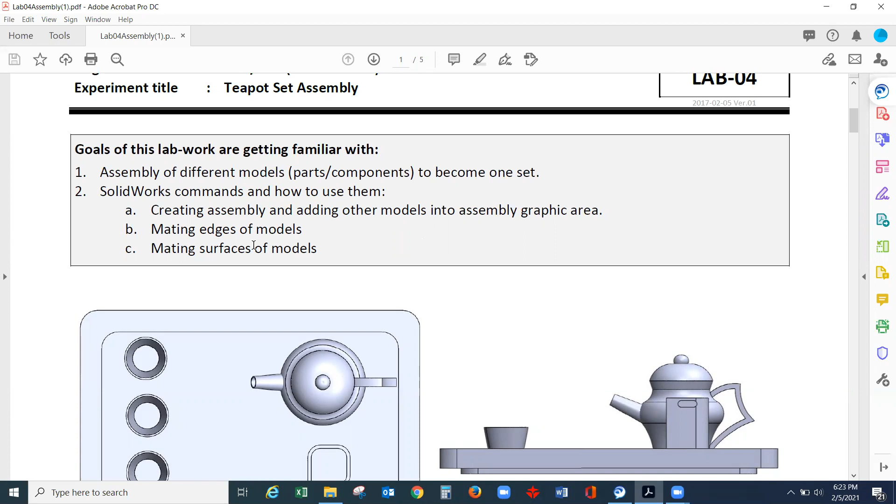The first step on this lab is to open the parts that we need to assemble. From experiment number 1, we completed drawing a cup. On experiment number 2, we completed drawing the teapot. And experiment number 3, the dishpan. And one of your exercises is the toothpick holder.

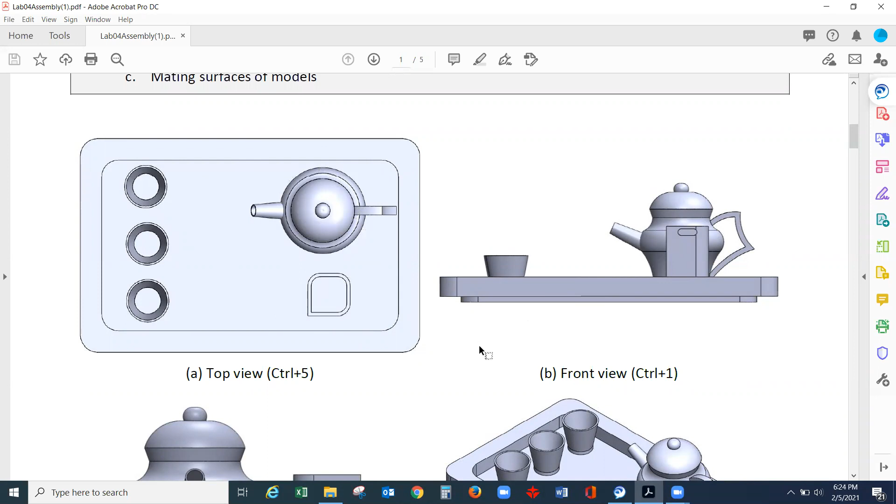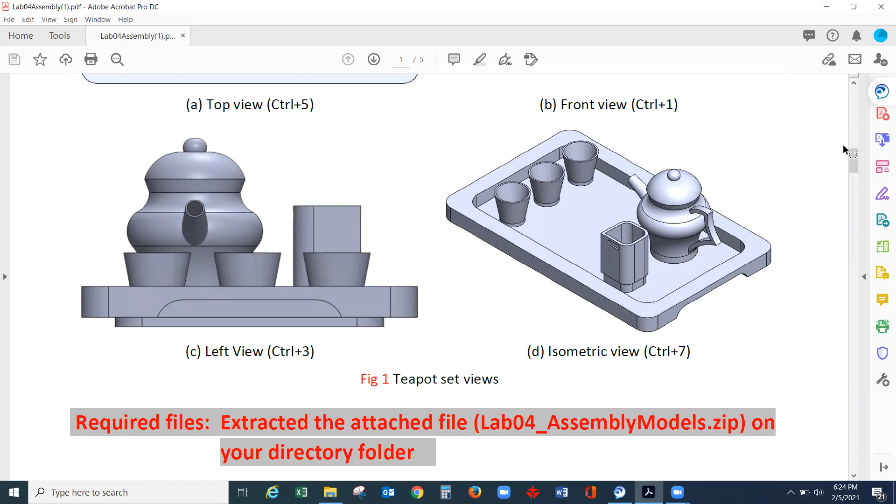So we will open the drawings. For us to be in common, on your BBLearn all of these parts are available. What you need to do is download and save it in your folder.

Let's follow the steps. Step number 1, creating the assembly. You need to open two files. We will assemble first a teapot and a teapot lid. So open the folder that you have downloaded and then open the teapot. Just double click and your SolidWorks will start opening it.

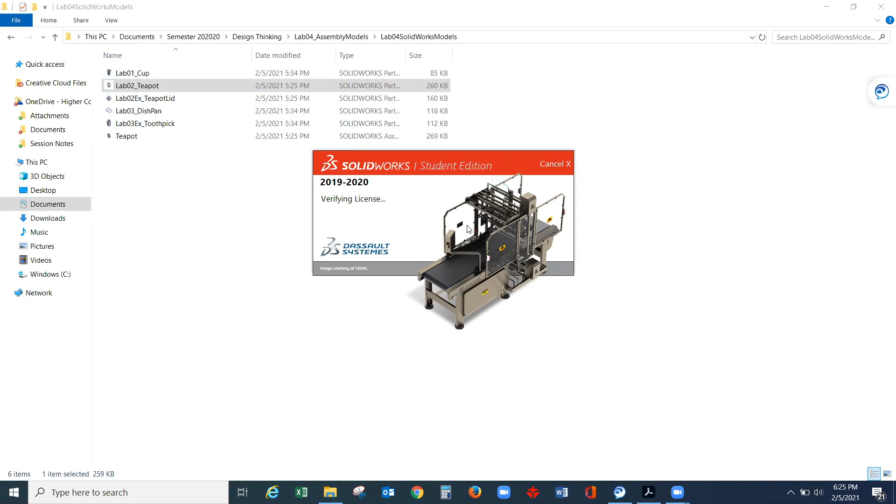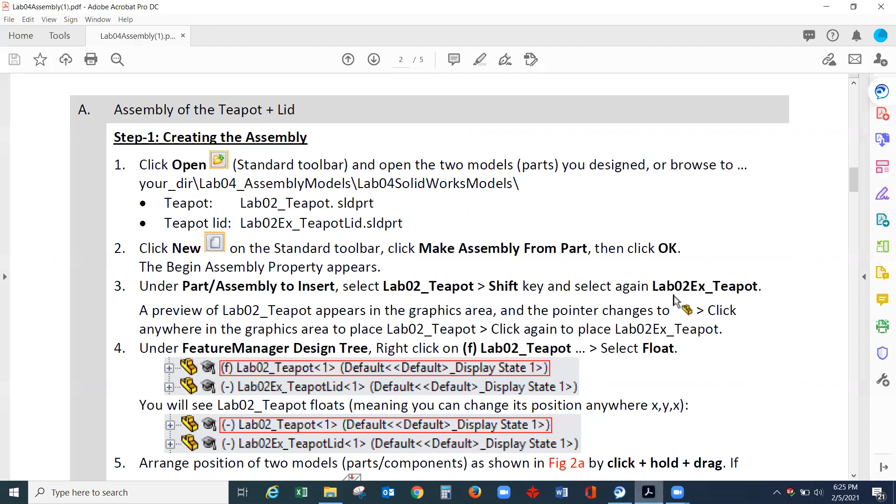So we will open the two files at the same time, first the teapot lid and then the teapot. As you can see here on the figure, for our top view, front view, and left side view, also the isometric view. So this is the final assembly that we need for this experiment.

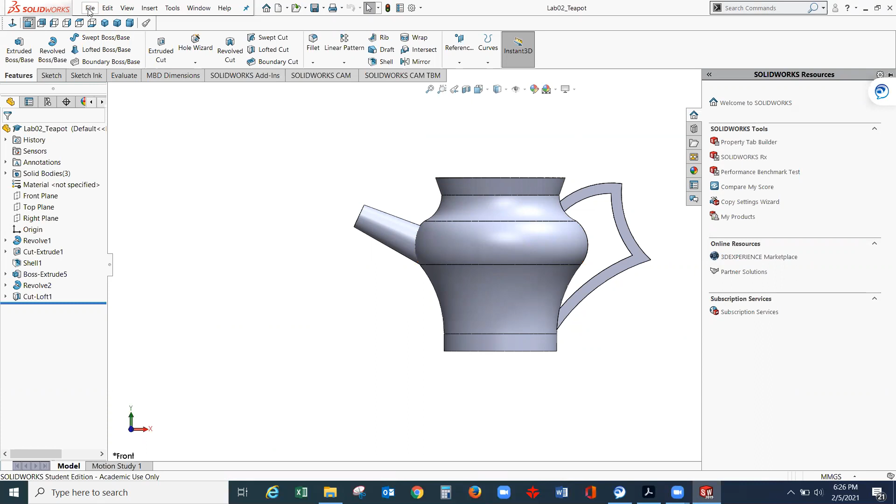So this is our teapot. We need to open one more file, which is the teapot lid. This is one of your exercises, so open it. This is the teapot lid.

Let's follow procedure number 2. Click New on the standard toolbar and then select Make Assembly from Part. Where is that? Make Assembly from Part. Go to File, Make Assembly from Part. Select this option.

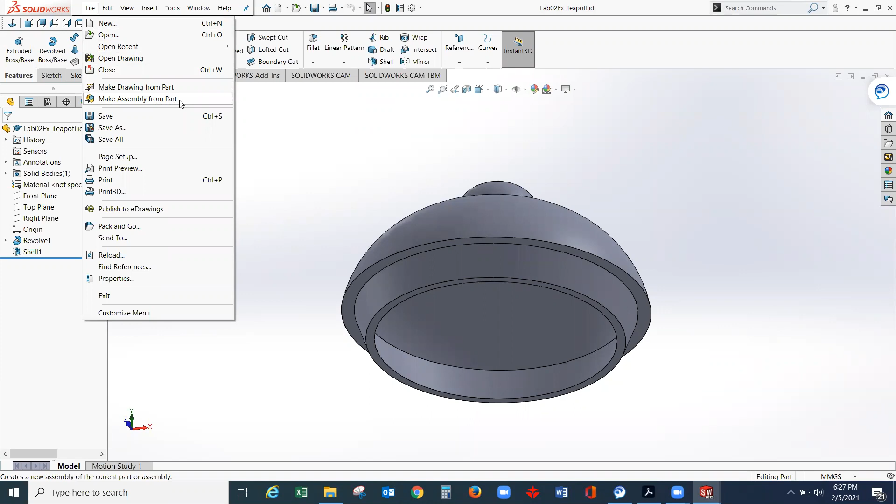Once you've selected Make Assembly from Part, these two files are here under Part or Assembly to Insert. The first one is highlighted in blue, meaning it is selected. So press the shift button on the keyboard, then select the other one, teapot lid.

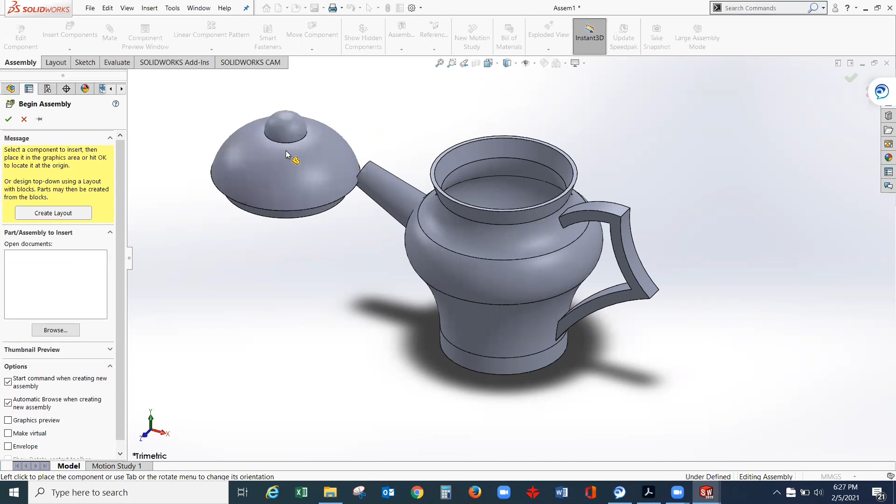Then click anywhere on the drawing area and your teapot will be inserted on the drawing area. Click again anywhere to insert the teapot lid. So now I have my two parts.

You can move this one anywhere; just click and hold your left mouse button, and you can move and place it anywhere on your screen. Now here on the FeatureManager Design Tree, you'll see a minus sign and an F sign. So for teapot lid or teapot, I go to teapot, right click, and select Float. The F symbol will turn to a minus indicator. So both are minus, meaning you can move your drawing anywhere on the drawing area. This is to float.

Let's check the steps. Step number one, creating the assembly - it's done. We opened the two files and then created assembly from part - number two is done. Then under Part/Assembly to Insert, select both by holding the shift key on the keyboard.

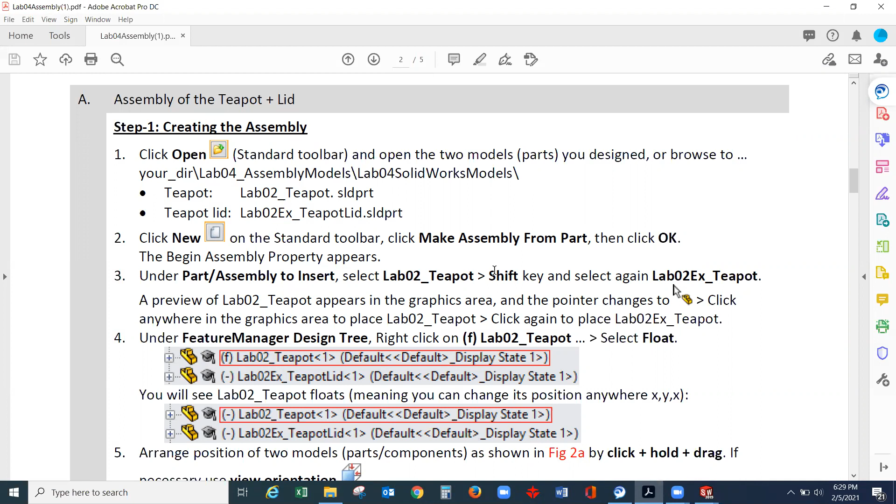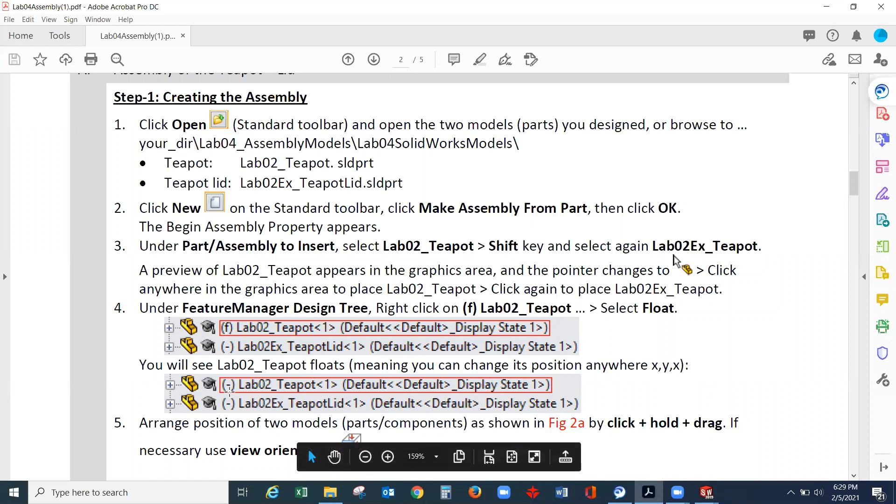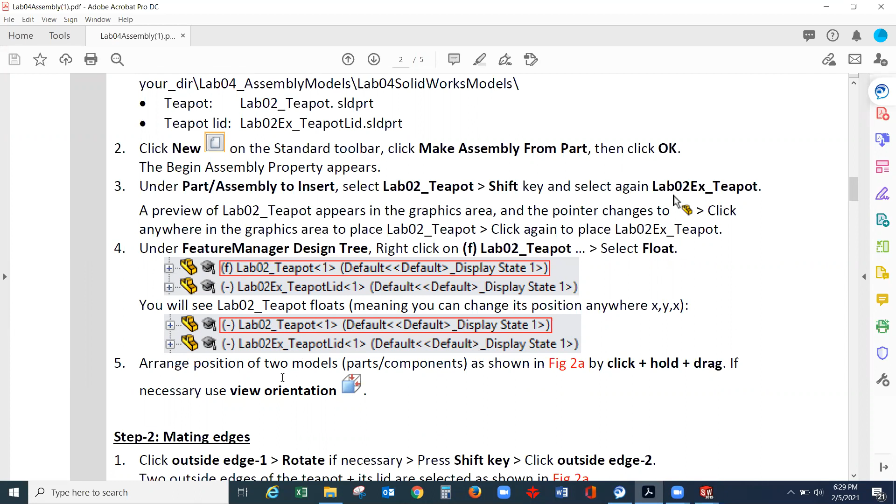Then under the feature manager design tree, this F symbol, right click, we turn it into a minus sign, so both are movable. We can move around the drawing area and arrange the position of the two models by click, hold, and drag using your left mouse button, or use the view orientation if you want.

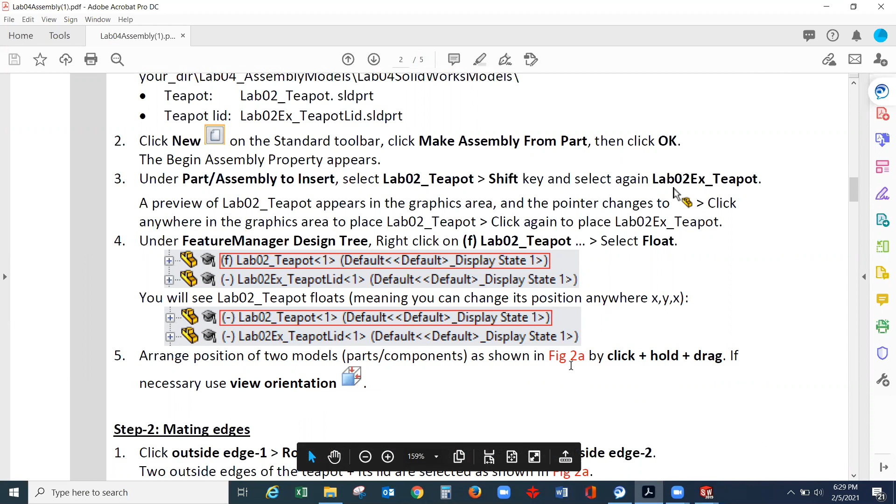Click, hold, and drag as shown in figure 2A. Where is 2A? This is it. So we will position the teapot and teapot lid on this position - move the teapot lid on this side and the teapot under the teapot lid. So this is the position.

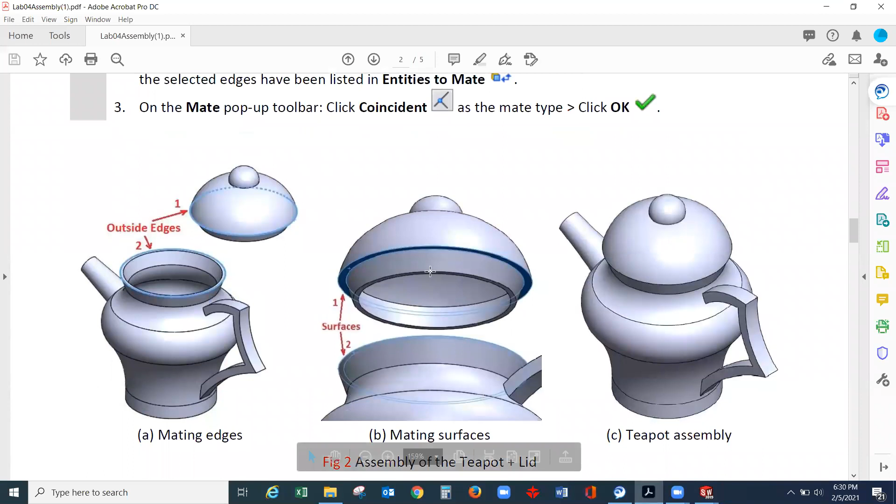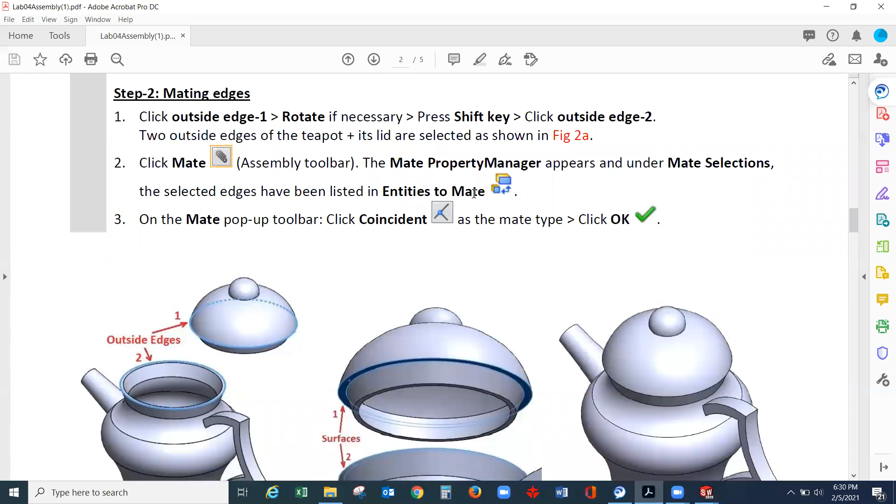Let's go for step number 2, mating edges. Click outside edge 1 and rotate, then press the shift key, click outside edge 2. As you can see, once you select the outside edge 1 and edge 2, they will be highlighted in blue. Then click the Mate option on the assembly toolbar. If the mate pop-up toolbar appears on the screen, select the Coincident option, then select OK. So this is our first mate.

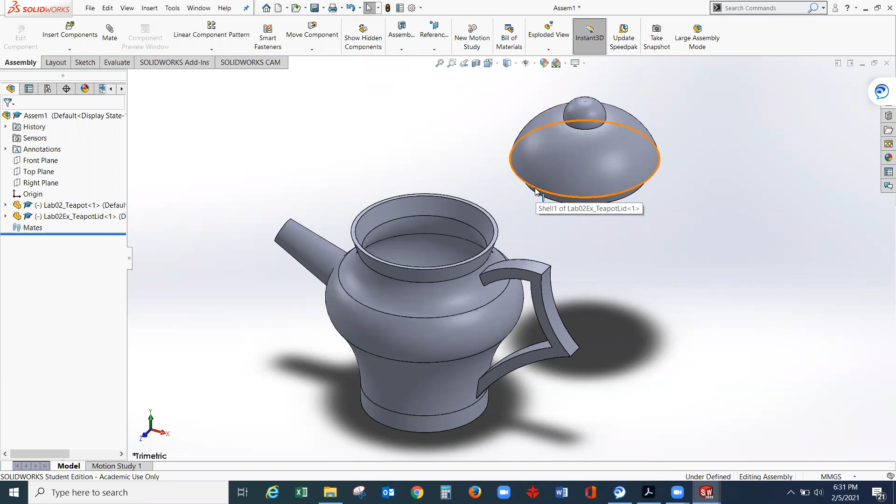From this position, select this outside edge of the teapot. Select it, it will be highlighted in blue. Then shift and hold the keyboard, and select this outside edge 2.

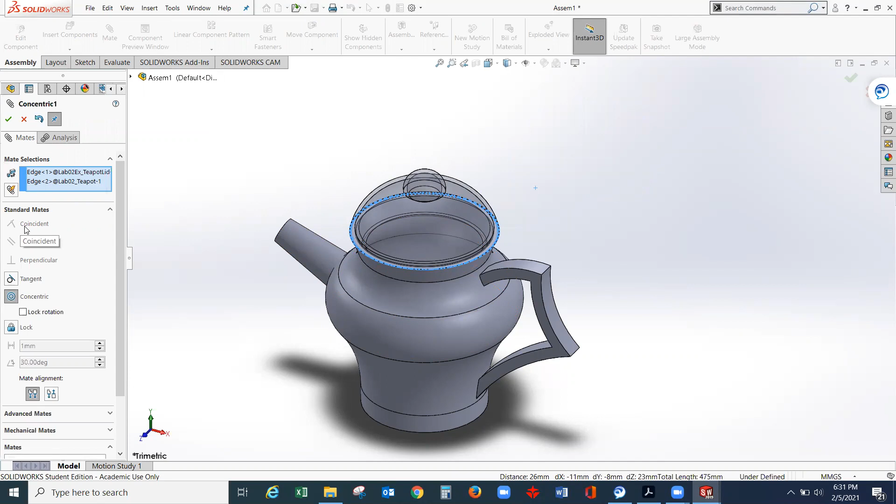Under the assembly toolbar, select mate. It will automatically join. So this is the mate selection, edge 1 and edge 2, and it is automatically coincident, so no need to choose anything. Then select the green check mark as OK.

As you can see here, you can still move the teapot lid from the teapot by moving up and down, so we need another mate to fix this.

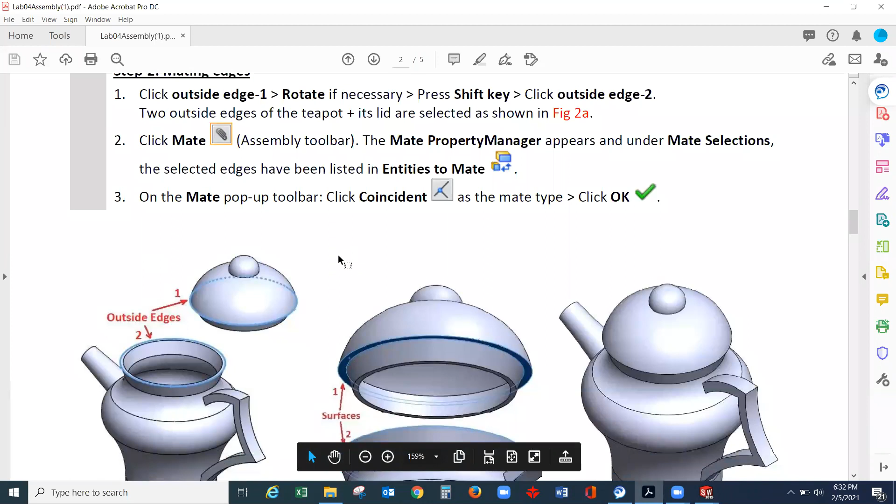In the lab sheet, go for step number 3, mating surfaces. So we will mate the surface in this case. Click surface number 1, press shift key, and click surface 2. So two surfaces of the teapot and its lid are selected, as shown in figure 2B.

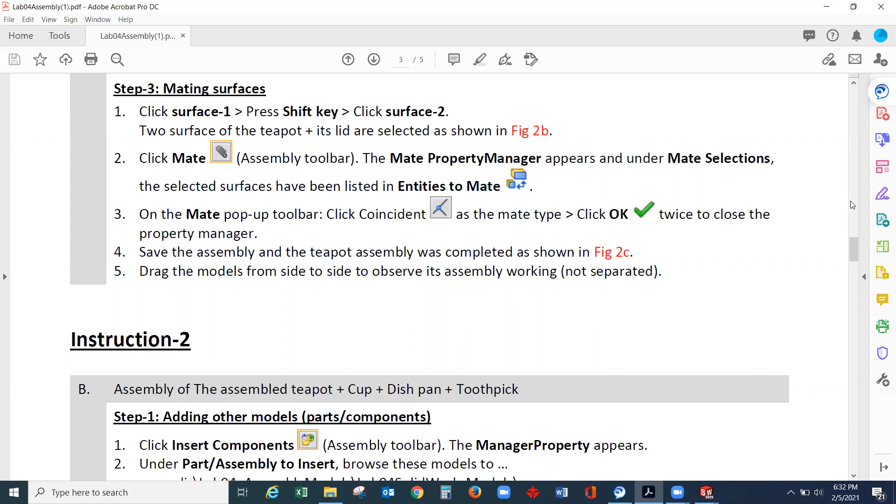This is our figure 2B. So we are selecting the surface. On the first option we select the edge, we are selecting the outer edge. Now take a look on the surface.

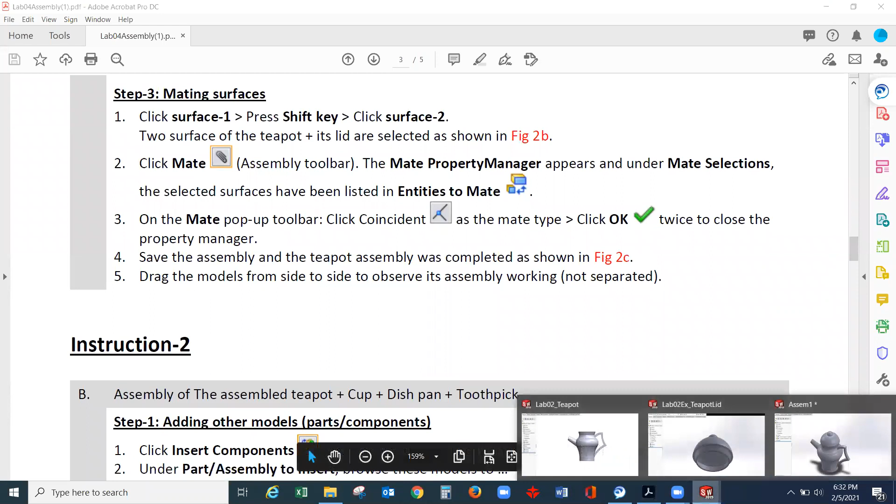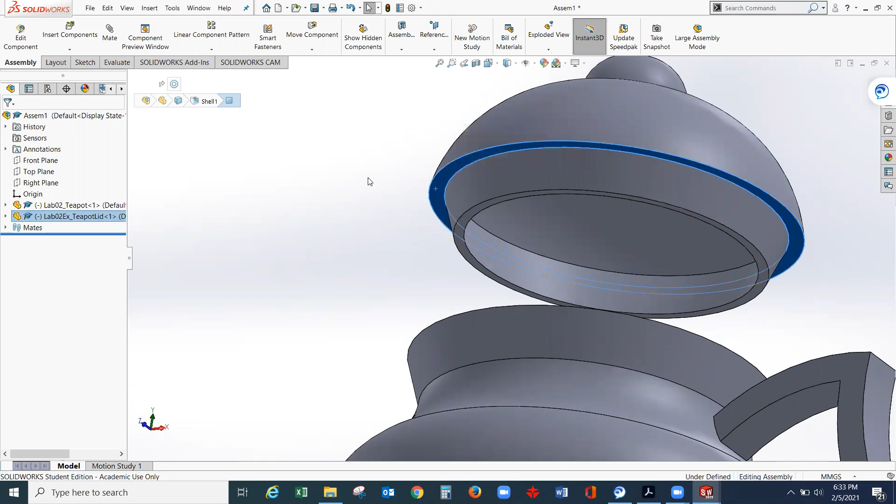Let's do this mating of the surface from here. You can rotate this one by holding your middle mouse button, click and hold to rotate. Once you see this surface, I'll make it closer. Once you see the surface, select it - not the line, this surface. Select the surface, it will be highlighted in blue, and then rotate by clicking and holding your middle mouse button.

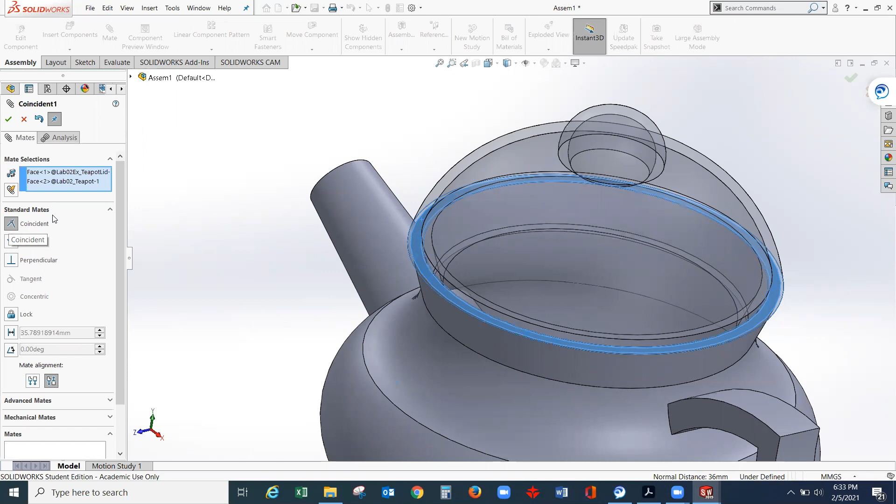Shift on the keyboard, hold it, and select the surface of the teapot. So this is our surface number 2. Then the same steps, select mate and coincident. It is active now, coincident, and check.

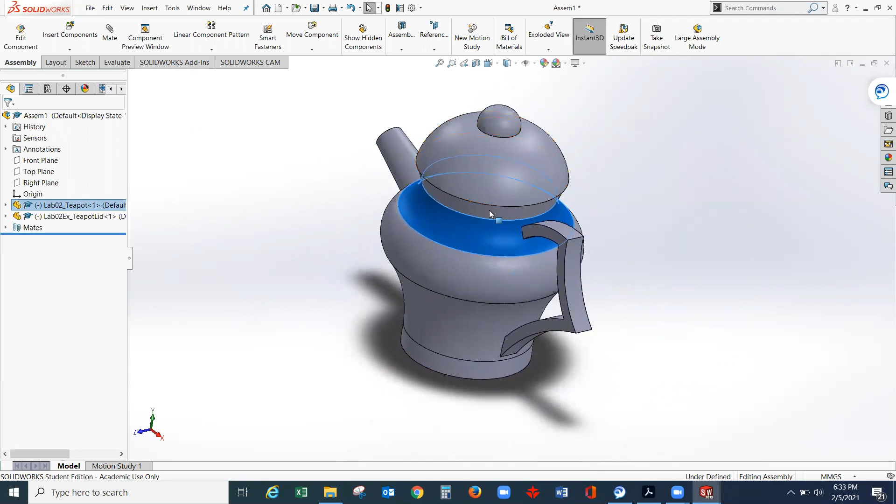We'll zoom out. As you can see here, if you move the teapot, the lid will come together with the teapot. So they are fixed together by using these two mates.

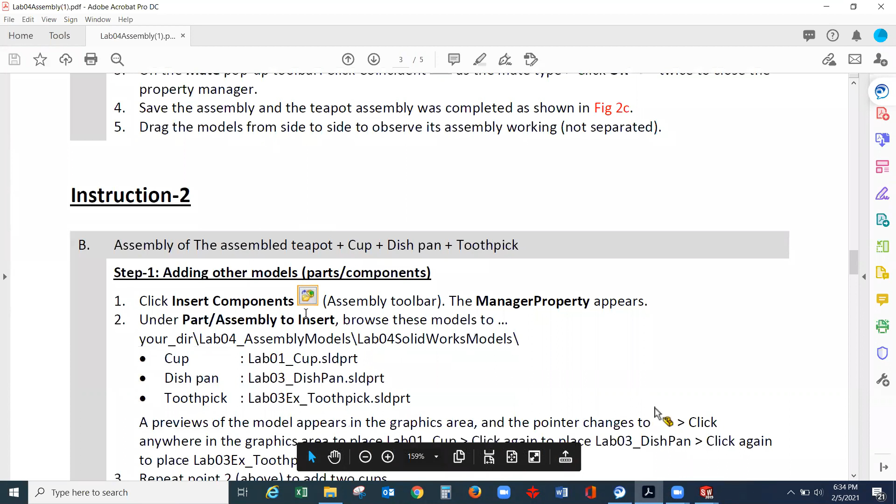And now for instruction number 2, assembly of the assembled teapot plus cup plus the dishpan plus the toothpick. So these are the steps. Step number 1, insert components.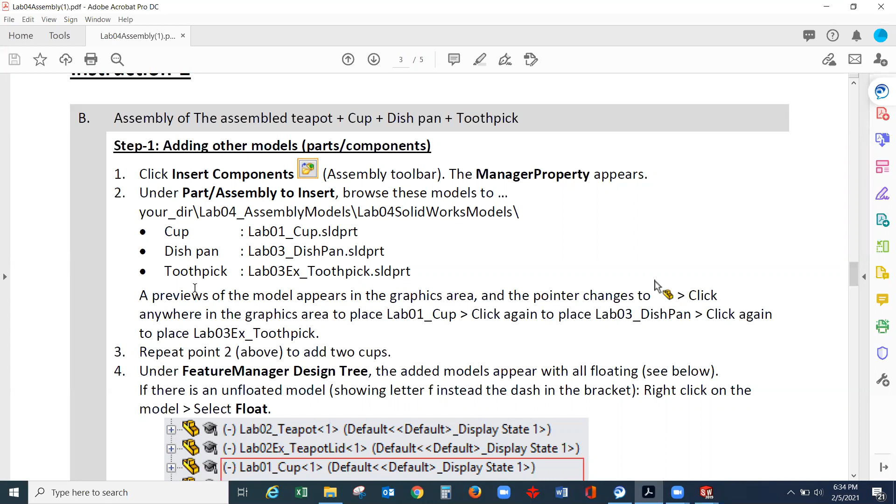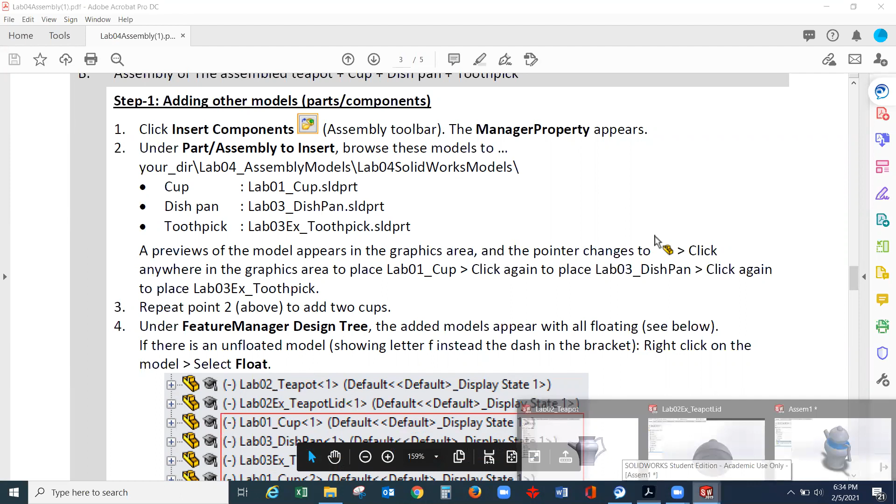Insert components. Under part assembly, to insert we will browse this model - the cup, the dishpan, and then the toothpick. Then we will repeat it to add 2 more cups. Let's insert components here.

On the assembly toolbar, there is one option, insert components. Select insert components, then browse the folder for where you saved the files. In this case, we will select the cup, hold control on the keyboard, then dishpan, and then the toothpick. So we select 3, then open.

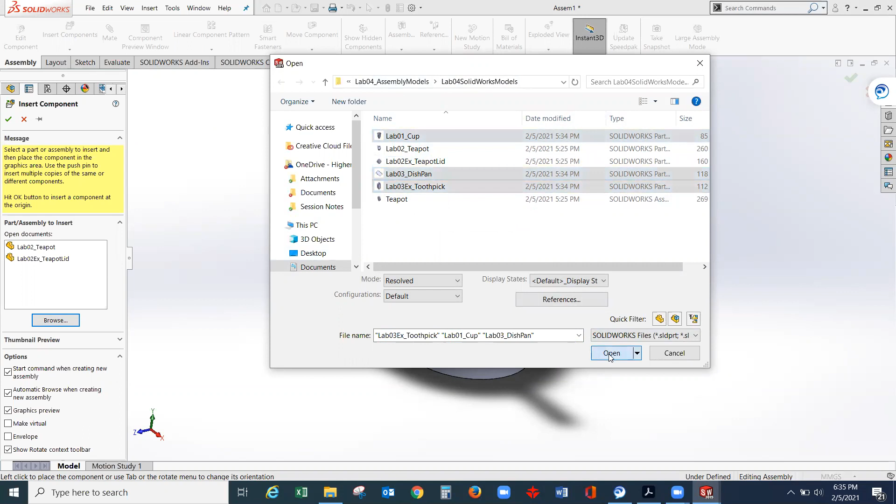Then select anywhere on the screen, click to insert the component. So this is the cup, 1. And then I have my dishpan, click, so 2. And lastly the toothpick, click here.

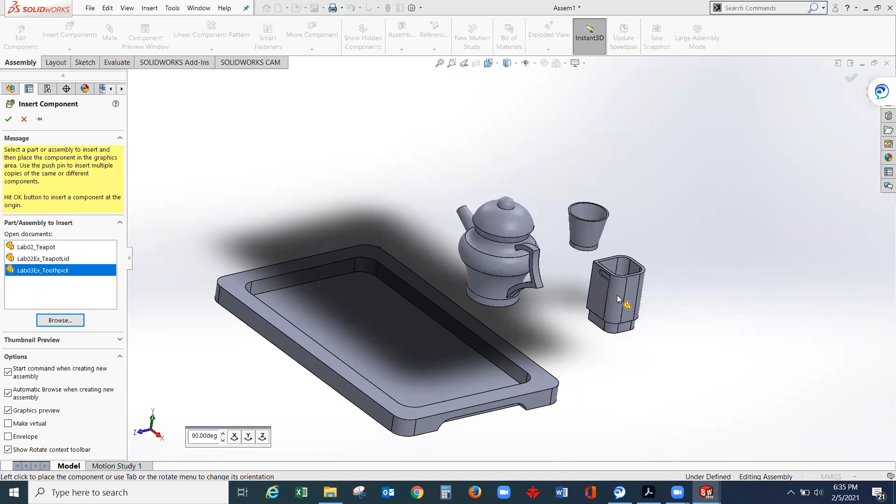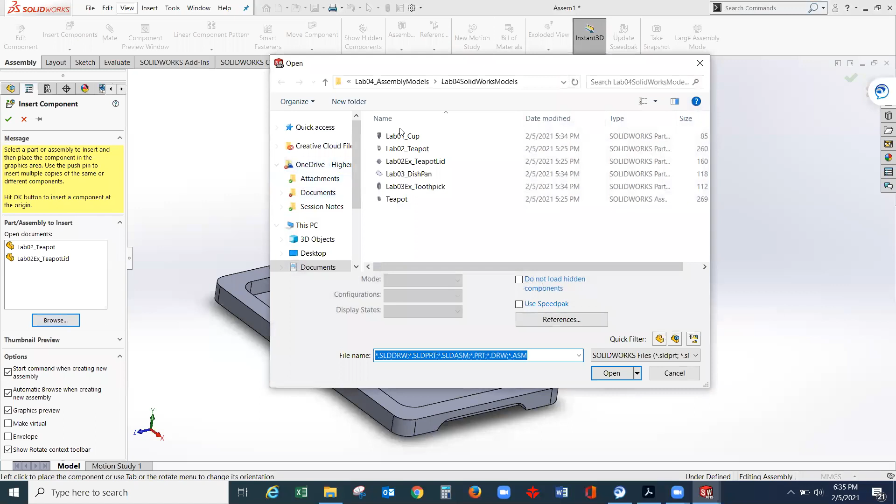On your lab sheet we have to insert 3 cups, 3 cups. So we will do the same procedure: insert components, browse, select cup, open, click on the screen. Now I have my 2 cups. Then insert components, browse, cup, open, click on the screen. So all my components are complete now.

And we will assemble these components - the cup, the toothpick holder, the teapot with the teapot lid - on top of this tray. So let's follow the steps.

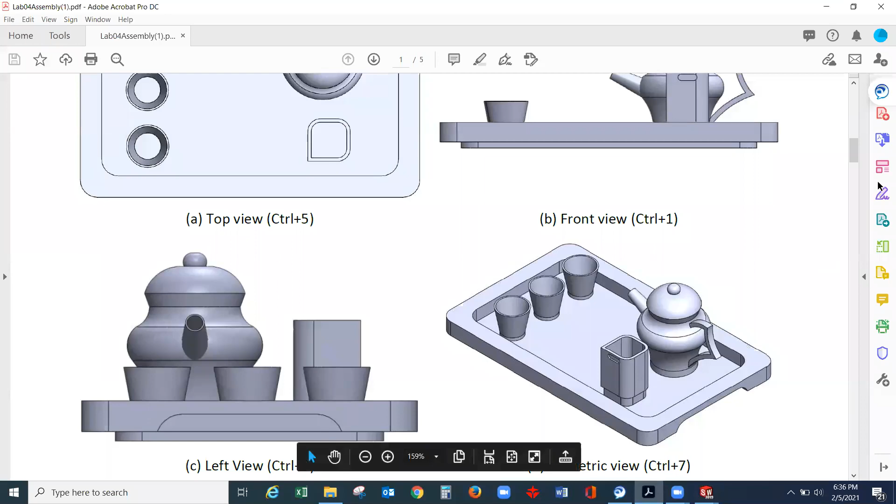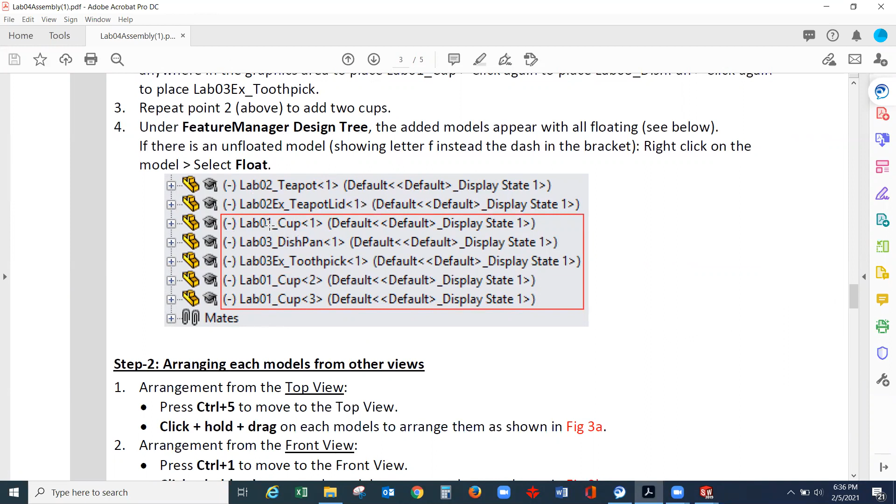Under the Feature Manager Design tree, check that all these inserted components have a minus sign here. If you see letter F, just right click and select float to change the condition of the drawing. Let's check - this is the Feature Manager Design tree, all are in minus indicator here. So we're good to go now.

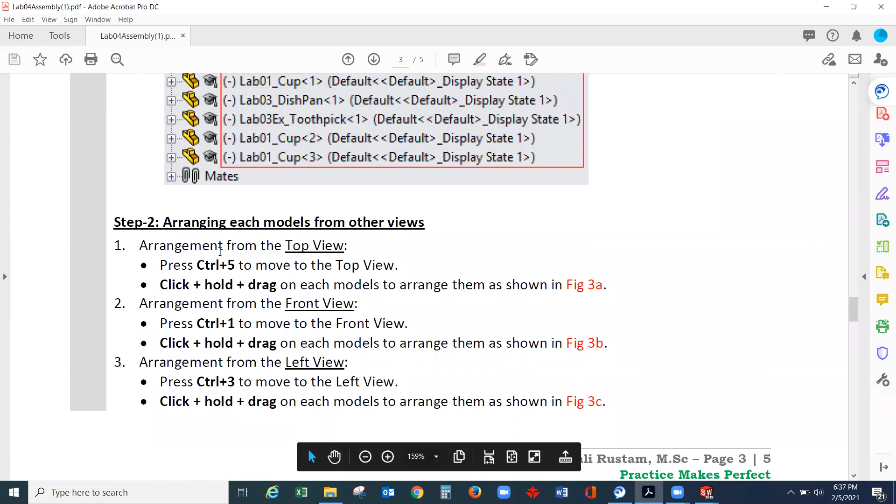For step number 2, arranging each model from other views, these are the shortcuts from your keyboard. From the top, press Ctrl 5 to move to the top view. Then click, hold, and drag on each model to arrange, as in figure 3A. We are using the left mouse button here - click, hold, and drag to arrange each model.

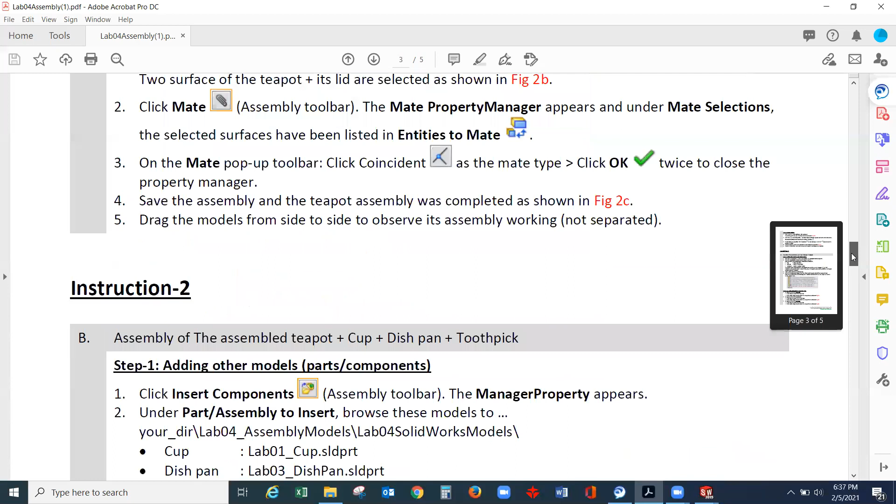As shown in figure 3A - where is 3A? This one. So on the top view, press Ctrl 5, and then we will arrange all the components according to this model. Let's go to SolidWorks.

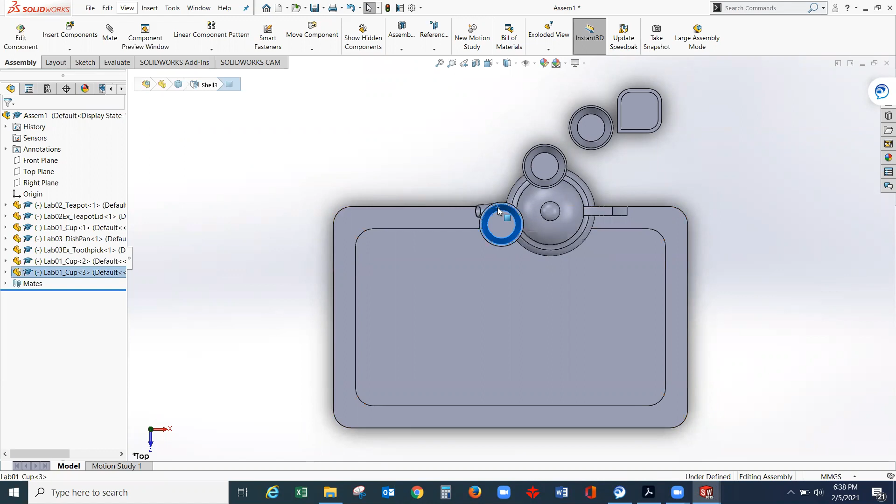Press Control 5, so I'm now on top view. Now arrange, click and hold the cup, then drag it.

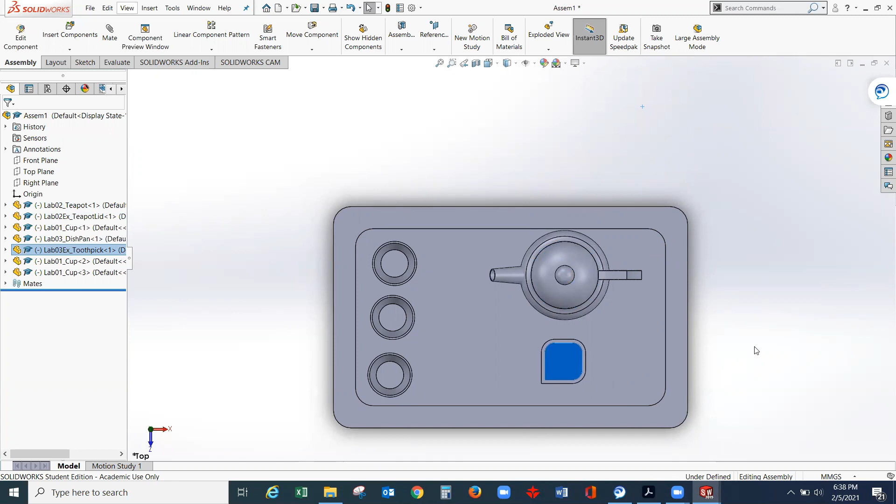To your desired position. According to the lab sheet, the position of the 3 cups are aligned in this manner. This one is the teapot, the teapot lid, and the toothpick. On my top view, all the components are inside the tray.

Once it's done, check the front view. Press Control 1 and observe this arrangement for the front view. All must be inside the tray.

Let's try to arrange it. Press Control 1. So none of my components are outside, like this, okay? So all are inside the tray.

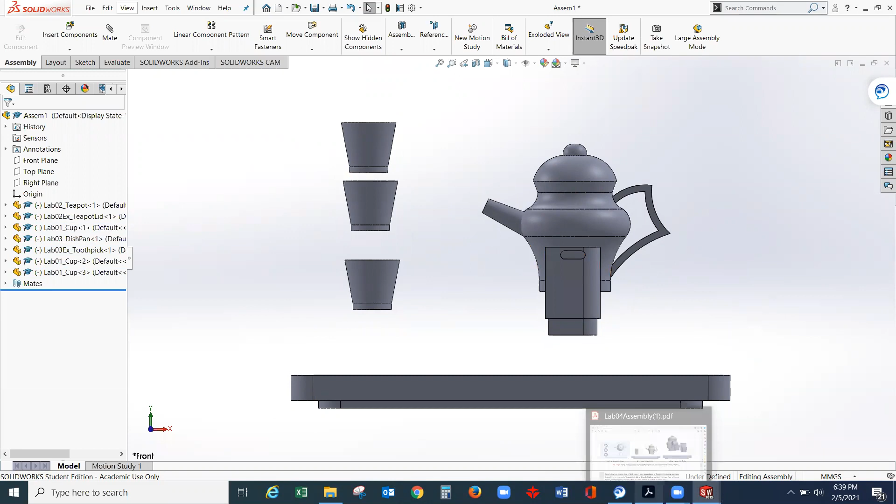Then next, on the left view, press Control 3. We will check if all these are inside the tray. As you can see here, these are our guidelines. So all are inside the tray.

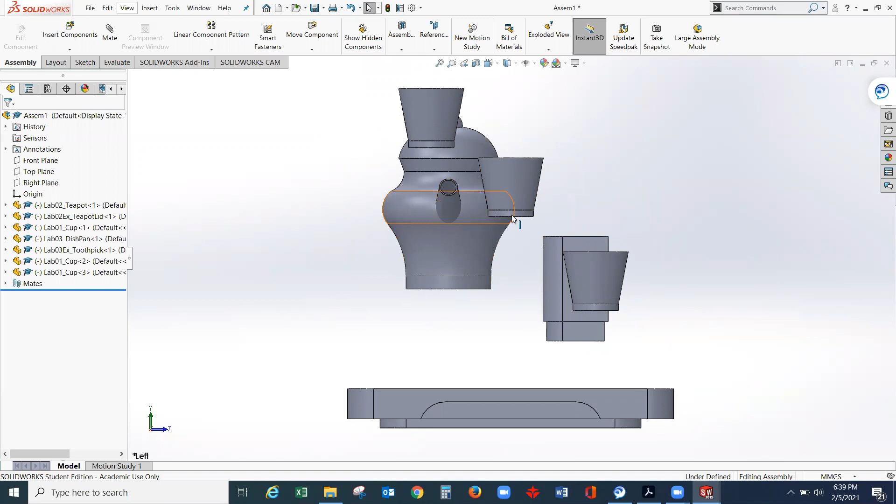So what we need to do is drop, or mate, these components on top of the tray. That's the next step or procedure we need to do.

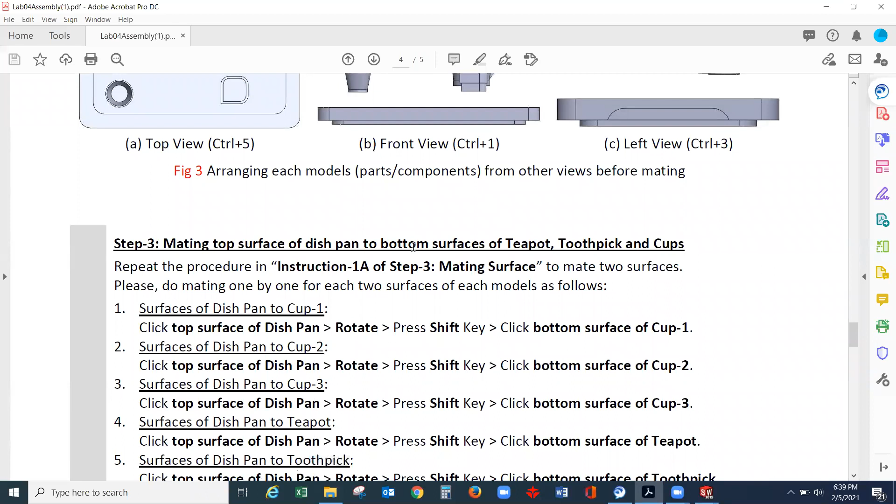Mating the top surface of the dishpan to the bottom surfaces of the teapot, toothpick, and cups. First, we'll follow this: surfaces of the dishpan to cup 1.

Click the top surface of the dishpan, then rotate. Press the Shift key and click the bottom surface of cup number 1. You can choose any one of the cups.

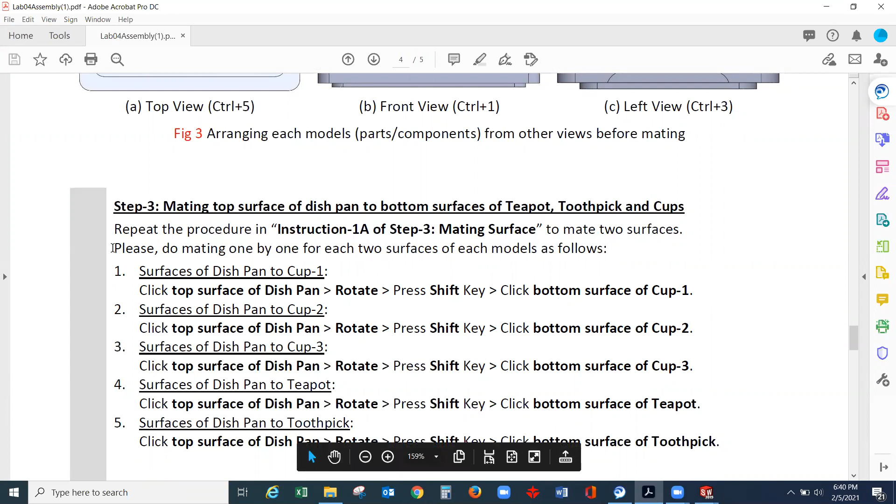Anyway, we need to do it one by one, okay? So we will do the mating one by one, until we reach step number 5.

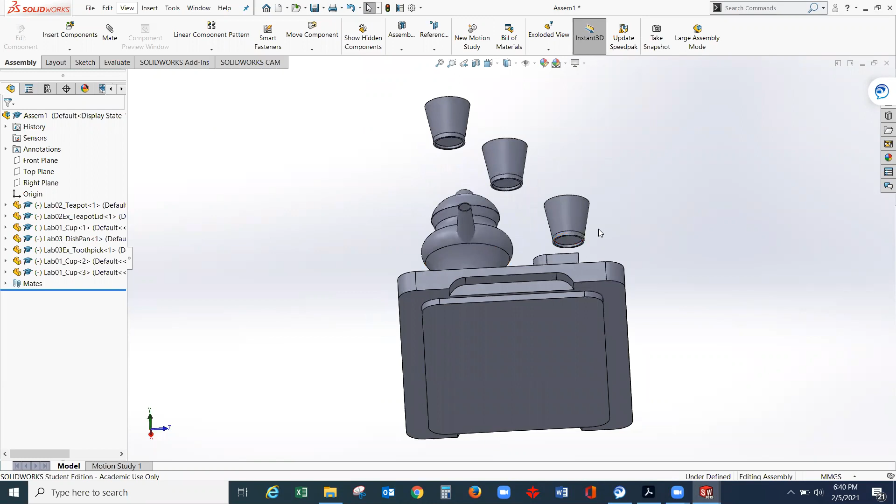It says we need to rotate to see the bottom part. I will zoom in. Select this surface, the surface of cup number 1.

And then the surface, shift on the keyboard, shift and hold. Select the top of the dishpan, and then mate. Okay, mate.

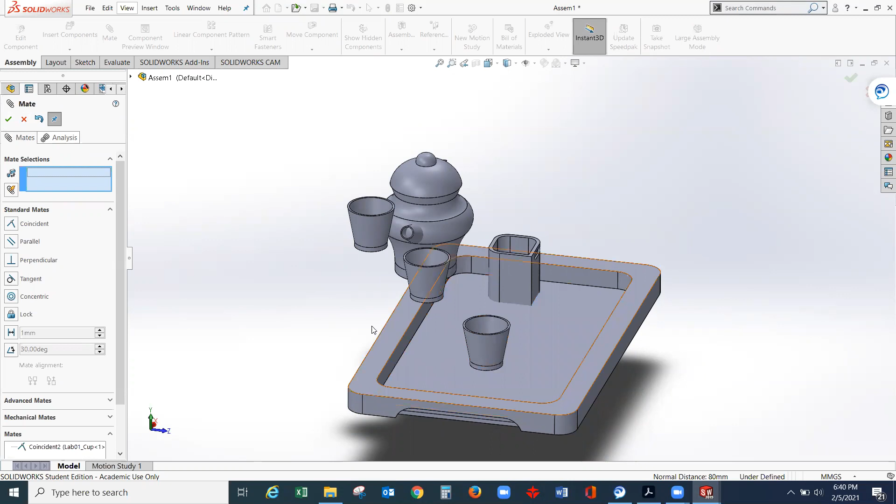Then check. And then again, we can move this one, we can drag it here. Select the surface of cup number 2.

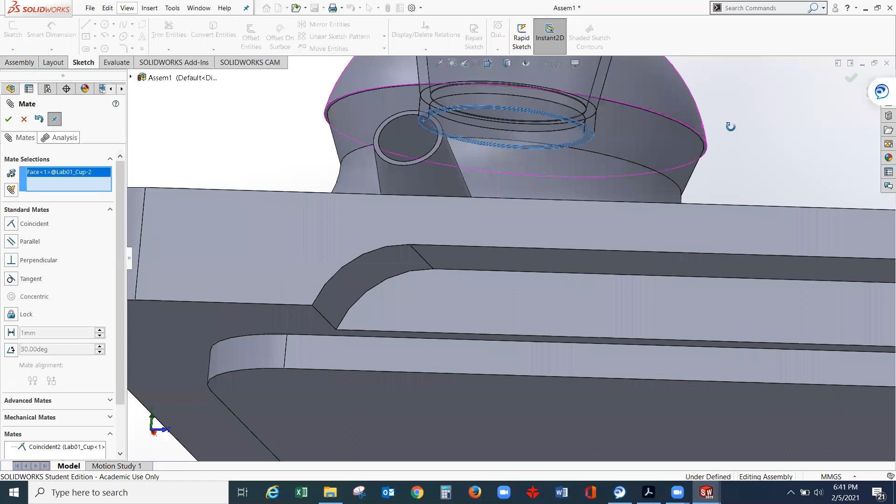Select this, and then this one. As you can see, face 1 and face 2. Then click the check mark. So I have my 2 cups now.

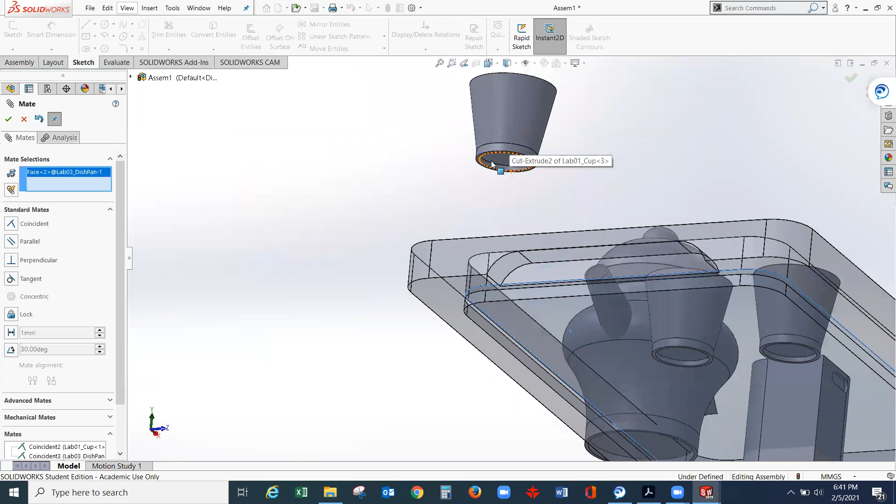Then again, either you select the tray and the surface of the cup, this cup. Check, face 1 and face 2, coincident. Check. So 3 cups are now connected with the dishpan.

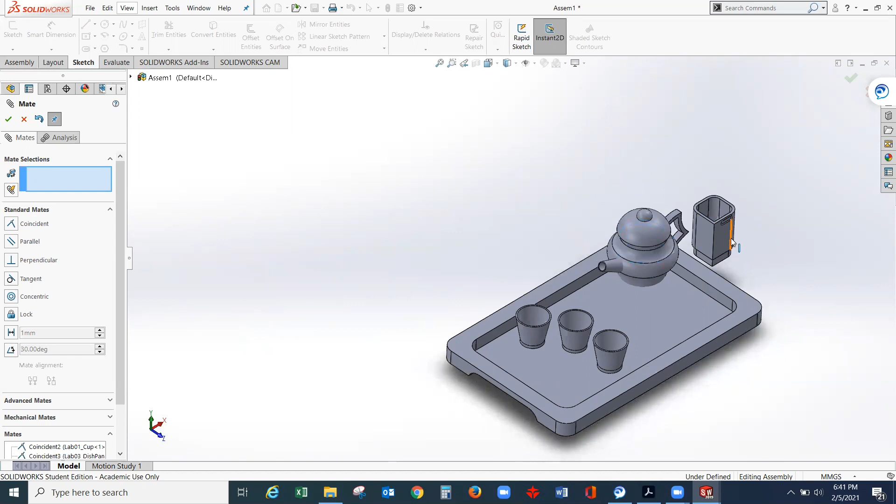This one we can move inside and up still. Click and hold your left mouse button to put it back on the position, so that we can see the bottom. Now I will zoom it in.

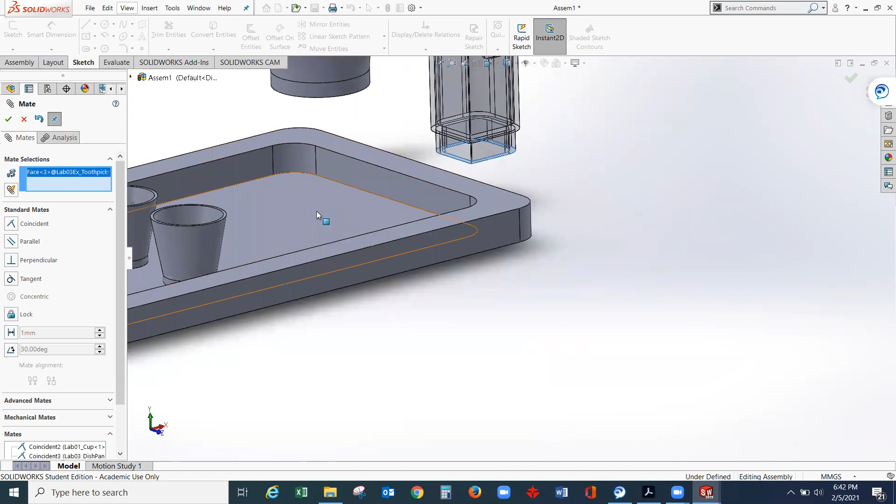Now select the bottom of the toothpick. This is the bottom of the toothpick, and then the top of the tray. Then mate. Okay.

Put this check mark and check mark, then move it inside. Move it inside. And lastly, this one and the bottom of the teapot. Select it, go for assembly, mate.

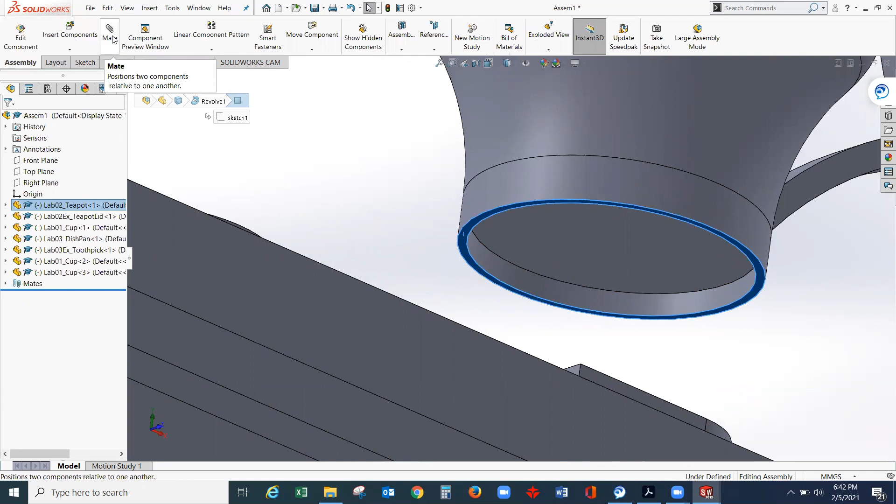So I'm selecting face 1, select the top of the tray. Shift on the keyboard, shift and hold, select the top of the tray, coincident, check, and check.

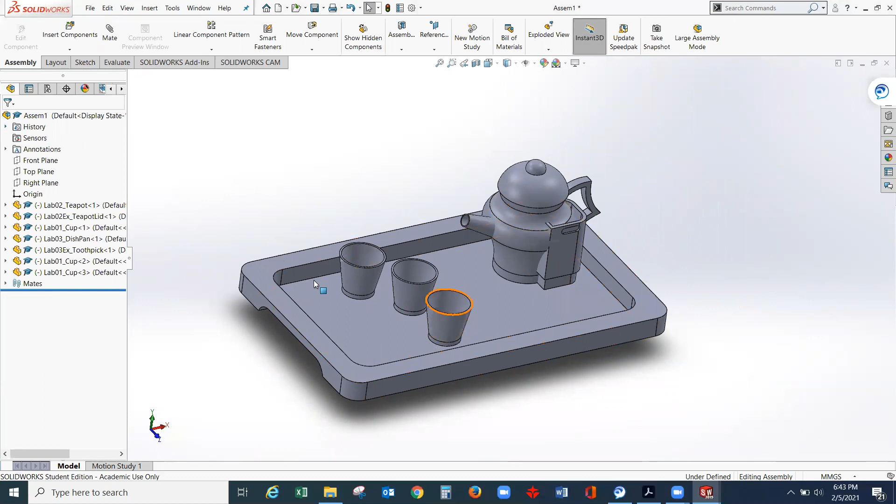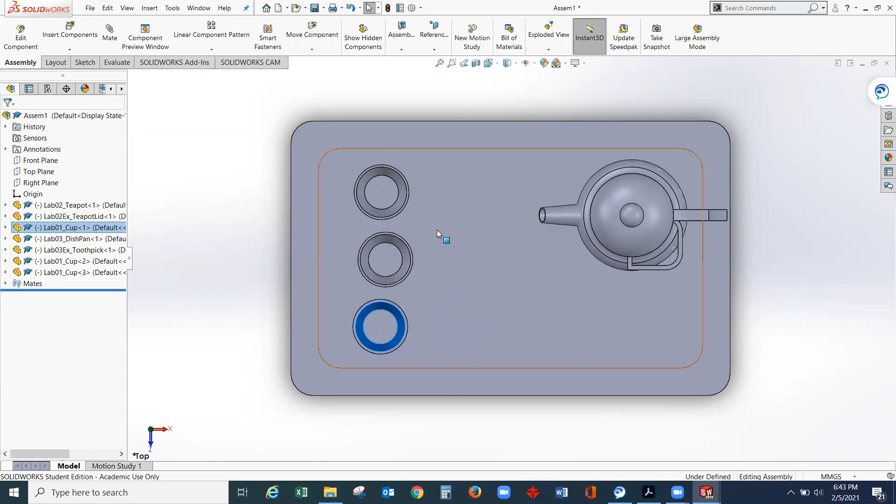Click, hold, and drag my left mouse button from here to here, so the 3 cups are aligned. And then my teapot, let's move it a little here. And then the toothpick holder, click, hold, and drag to this position. Okay, so all are inside the tray.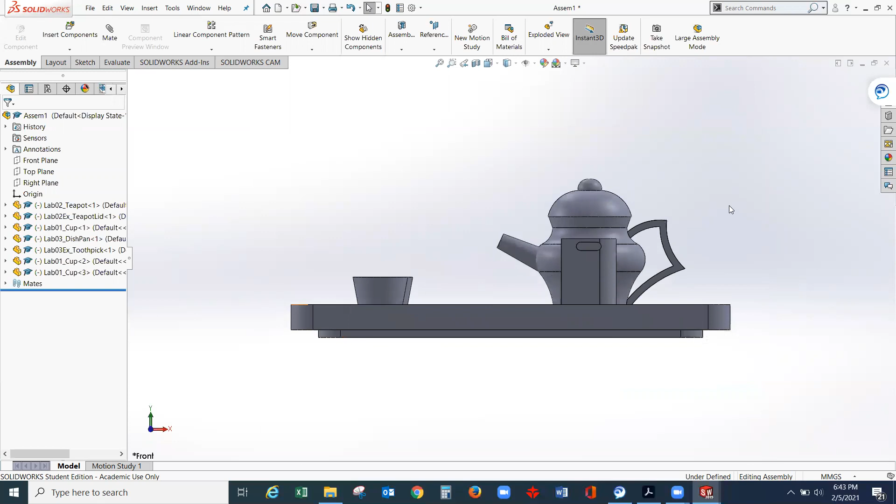Let's check it on the front view. Press Control 1, it is inside. And press Control 3, it is all inside.

Finally, go to view orientation and select the isometric view. Okay, select the isometric view. Now in this case, capture this screenshot and attach it to your lab report. You can save this one as a SolidWorks file

And submit it along with the screenshot. So you can save it, save as. And that's it, so it completes your lab number 4.

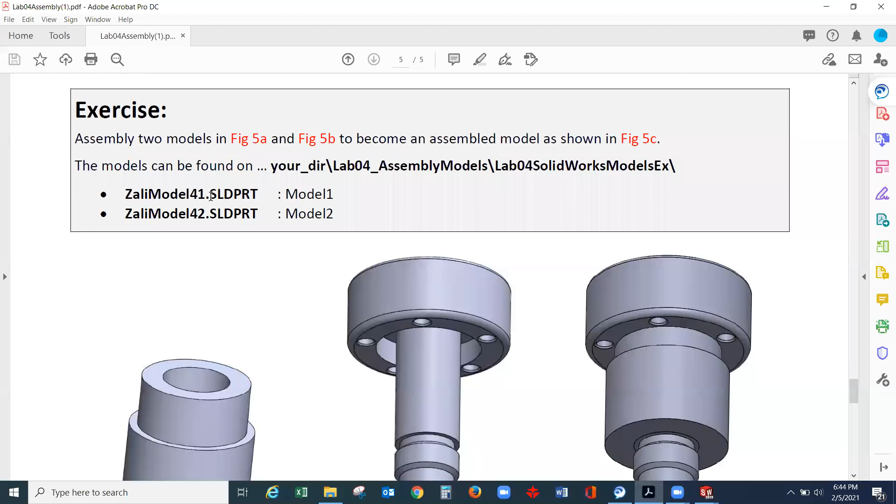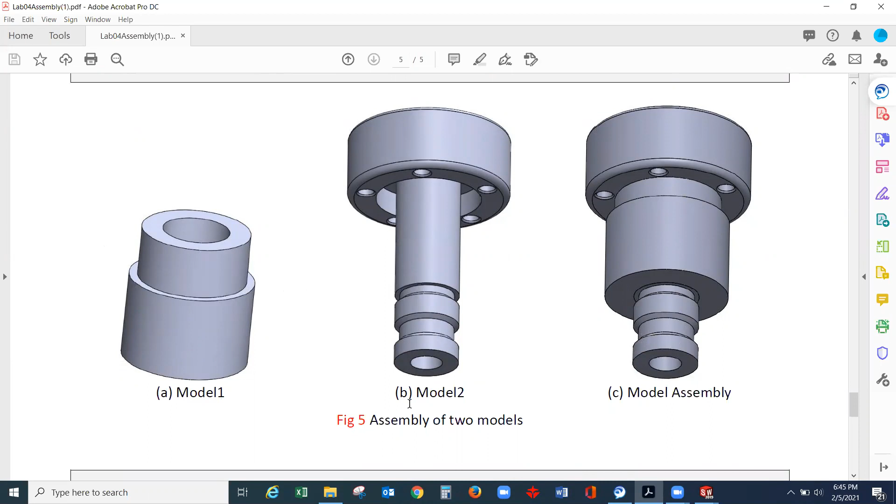Now, on the exercise, you have some exercise to do: the assembly of 2 models, okay? This model is given on Blackboard Learn, you can download it along with lab number 4. So you have model number 1 and model number 2. What you need to do is make an assembly, just like what we did today, and complete this assembly, mating the model parts together. So this is only 2 parts, okay?